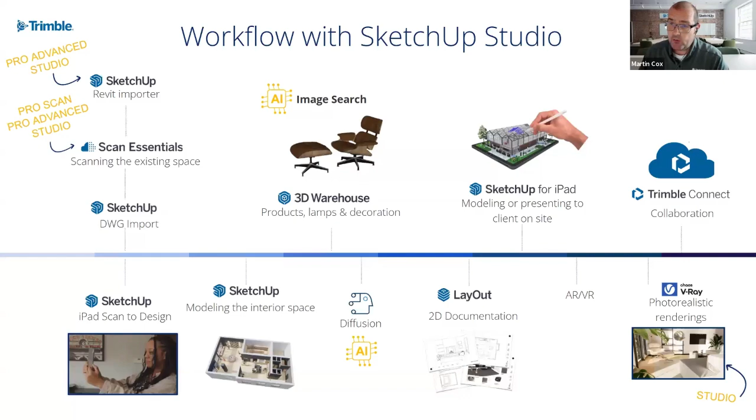Now, the first section, these are all real life examples of companies and people that have used SketchUp to develop interior spaces. Now, developing interior spaces, there are different things you need to consider. If it's for a home, there can be a lot of passion and emotions involved. Now, the great thing about using a 3D model is you can present the ideas to all members of the family, including children. So everybody can see the design concept. You're not showing 2D drawings that people don't always understand.

So you can sample your 3D materials, real life materials, include them in your model, and show exactly how things are going to look, whether it's in SketchUp or in a photorealistic render. And what this will do is it will prevent any confusion because not everybody understands 2D drawings.

A very quick example is my next door neighbor. They were getting an extension built, and they said, we don't understand the 2D drawings. I quickly modeled it for them in SketchUp. And the first thing they said is, what's that window doing there? So straight away, they were able to go back to the builder and say, no, that's not what we meant. So it immediately prompted questions to be answered.

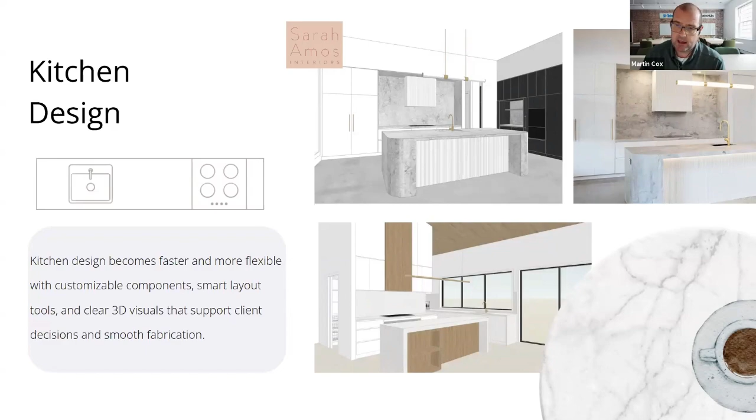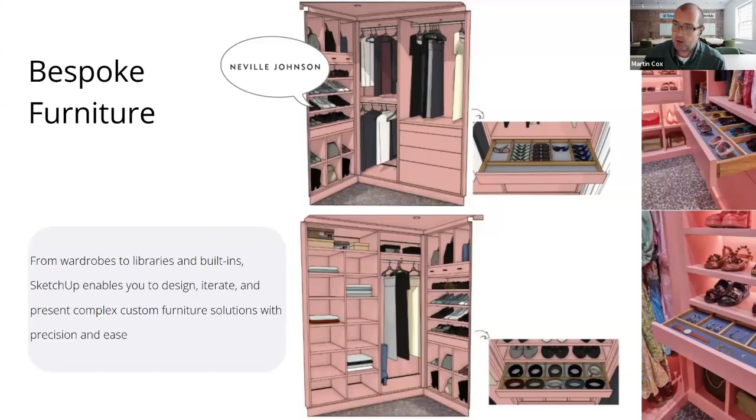It's these type of small details that can really make a difference when presenting to a potential customer. The animation we've created here really helps, sending that to a customer so they can believe in that design. So it's a small space here.

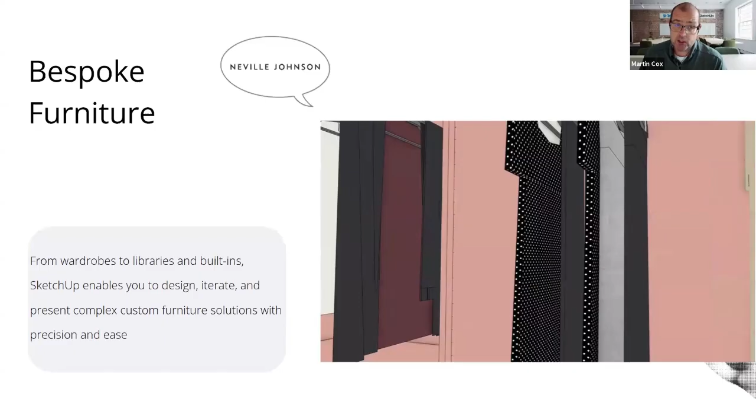I saw a question come in. I know I normally stick with questions at the end, but this is a really good time for it. The question is from Sarah: can SketchUp handle complex interior spaces, like restaurant or bar interiors?

Absolutely. This is an area where we have a lot of markets. We have restaurant design, store design, shop design, ranging from small to large, including DIY stores, so we know how large they can get. But these spaces absolutely can be worked in SketchUp as well.

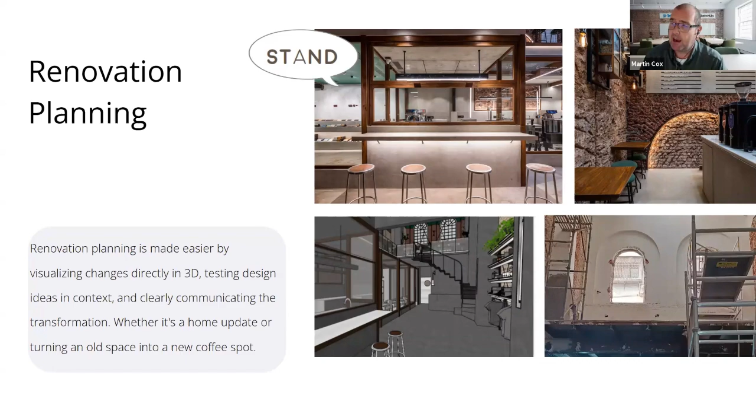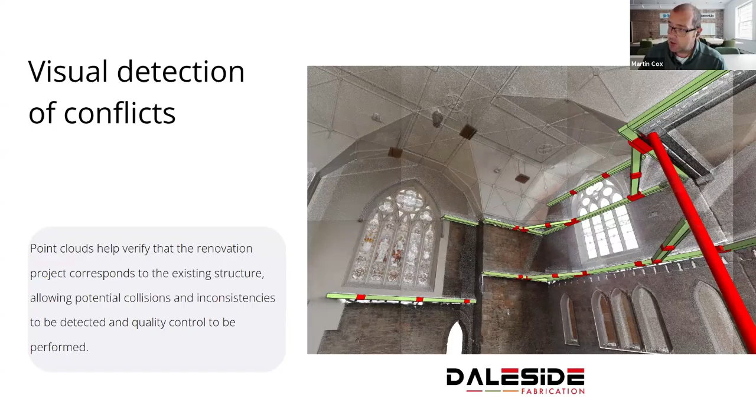Now, also working with complicated spaces, this is a conversion of a church. In this example, they had the interior of a church, and if I go to the next image, they used a point cloud scan. They're using Scan Essentials, which is in Pro Scan, SketchUp Studio, or SketchUp Pro Advanced. They scanned this very complicated interior space and were then able to fit it out, with these examples showing they wanted to put a climbing wall in this space.

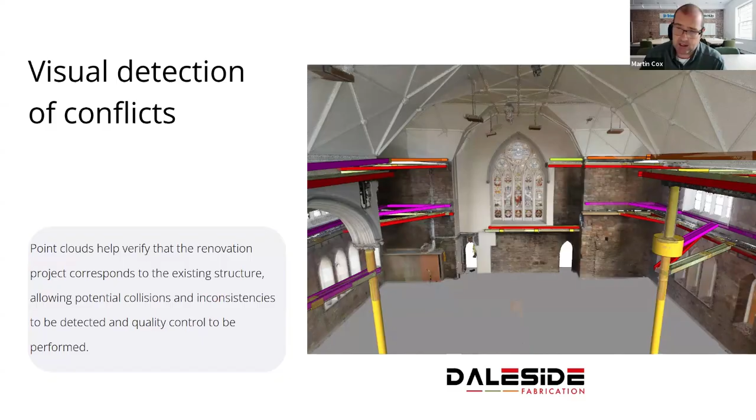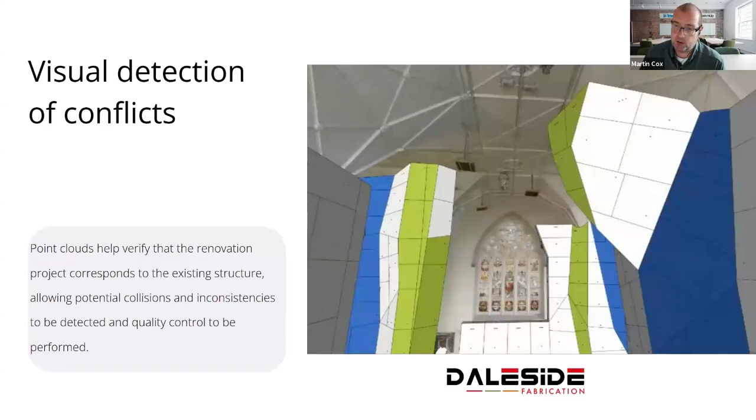Looking at the ceiling here, it's really complicated, and imagine trying to measure that. It's not impossible, but it would be very difficult. Being able to scan it using a 3D point cloud and work with that in SketchUp means you have that space correctly represented, and you can use it for detecting conflicts and information. They built this climbing wall in this particular space, but I just can't imagine having to measure that space manually. Working with a 3D point cloud in SketchUp makes it so much easier.

Again, questions come in: how does SketchUp Scan actually work? Scan Essentials, we're going to be talking about that in more detail, so we'll absolutely make sure we go through it. Understanding the process of a point cloud is a fantastic way of working with SketchUp.

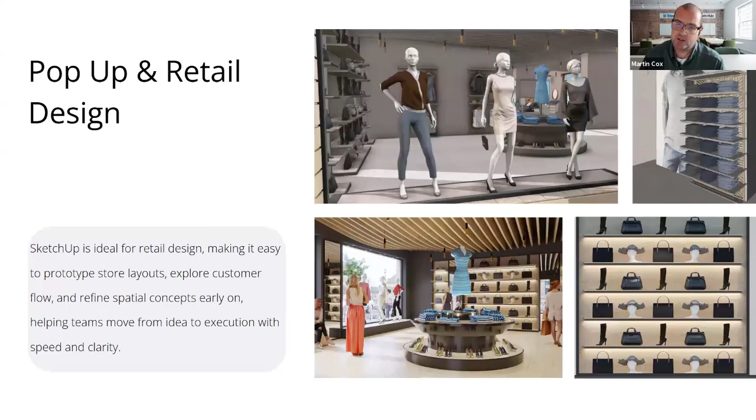So hopefully we'll go in the right direction.

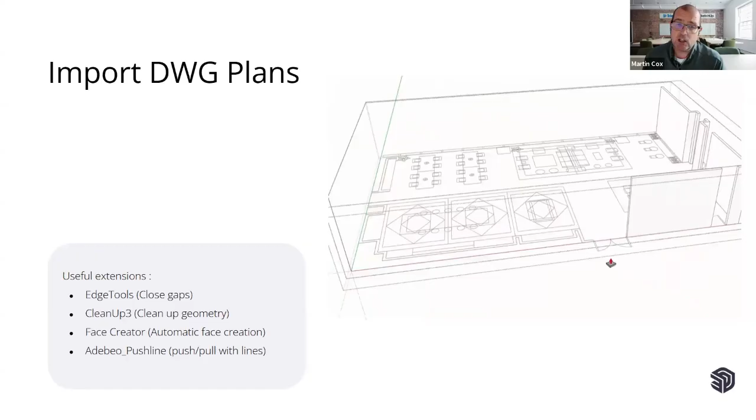So the first thing I want to talk about is you have your existing space. How do you bring that into SketchUp? There are multiple ways to do this. A popular way is creating your SketchUp model from a 2D file. A lot of people have a DWG or DXF as a plan, and you can bring that into SketchUp and, whether using an extension or just simply using the DWG file, bring that space quickly into a 3D model.

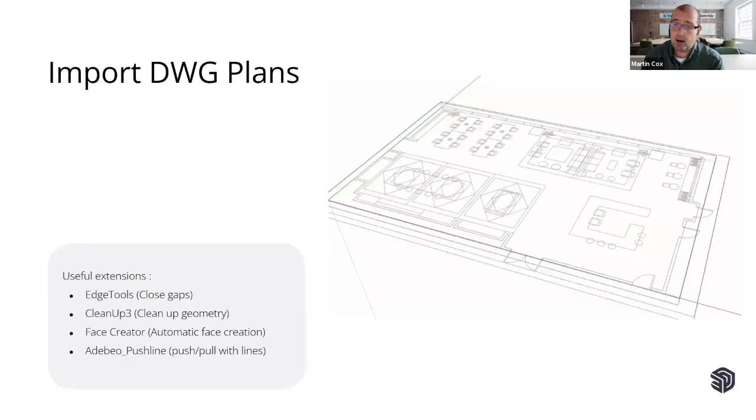Now, some of the DWGs need a little bit of cleaning up, and these are the extensions that can help with that, to help close gaps and clean up that geometry. So that's probably the most popular way of doing it, but we are moving further into more technical and easier ways of doing it.

So we've scanned the space, and we'll see how this scan actually looks. But what's quite important about this, it's one of those things we've all done: when you go to something, you measure everything, and then realize you forgot to measure something. Having a 3D point cloud means you can actually go and measure those points.

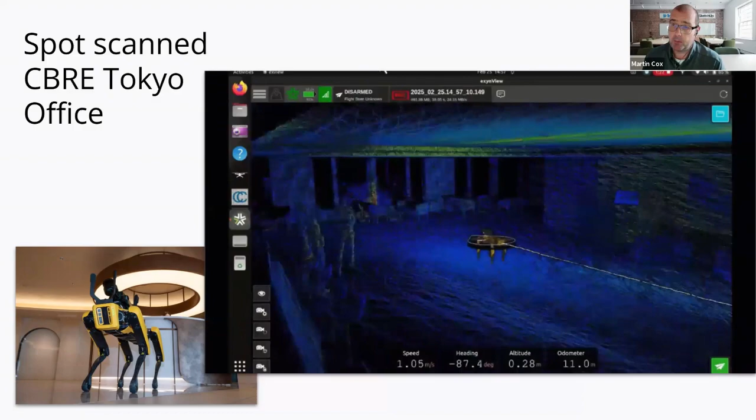And if we look at this next slide, Spot can actually walk around an entire floor and scan that entire space. This one here was for a large office refurbishment project in Tokyo, and using Spot, they were able to scan the entire office floor and use the point cloud to develop the model in SketchUp, and then the space was used to plan the new office and furniture layout.

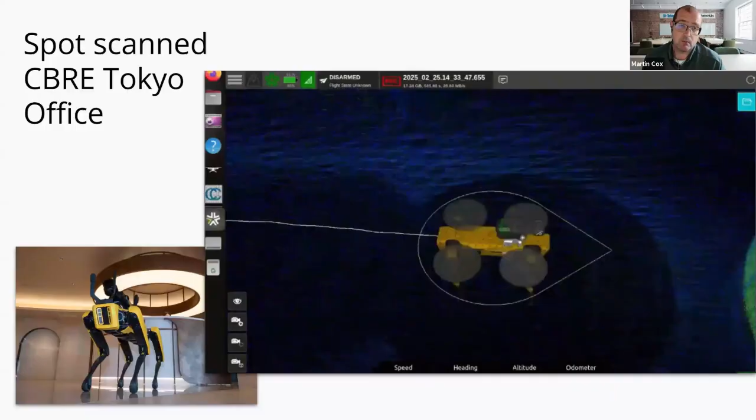So we can see in this animation here, Spot goes around and scans that entire space, and we end up with this large 3D point cloud that can be used in SketchUp. So this means, with this one, you get the raw point cloud data.

And once you've got that point cloud in here, you can use it to measure. Any point cloud format - we use the standard point cloud formats like PLY, E57, RCPs. Not going to go too technical, but then you can bring those points in and actually use those points within SketchUp.

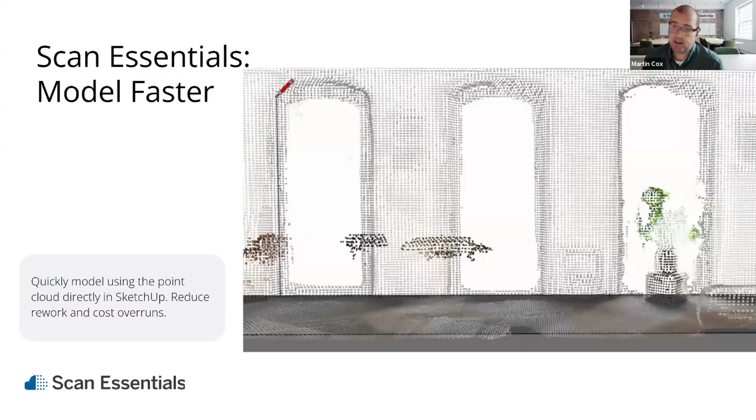There's also tools that you can use to check the accuracy of your point cloud compared to your SketchUp model. So in here, you can specify the distance that you want to see, like how it differs from the point cloud, and it will show in green or red if something does differ from there.

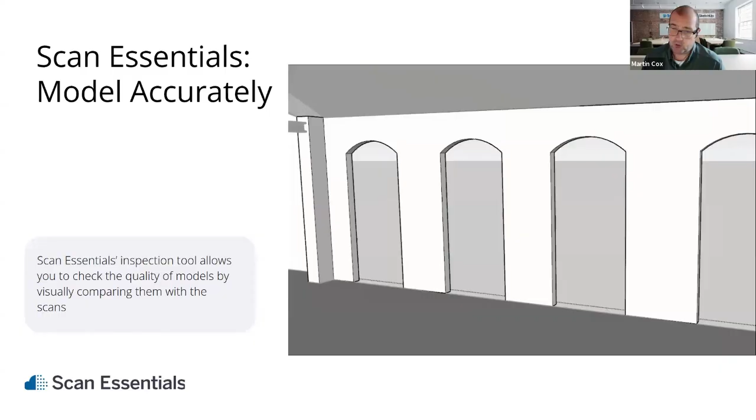So these are different ways of scanning in the room. I'm going to look at another way for the iPad later - we're going to look a little bit more focused on the iPad.

So now we have our space - our room or building, depending on what we're doing. How do we fill it using SketchUp?

It's the 3D warehouse. Now, the 3D warehouse is the world's largest repository of 3D CAD models, and these are libraries of real-world models actually created from companies. So there are companies in here that put their furniture in here, their windows in here, like Velux and people like that. And there's also user-generated models within here as well.

And it means that you can search for what you're looking for and then populate your space, so if there's options there that we want to bring in.

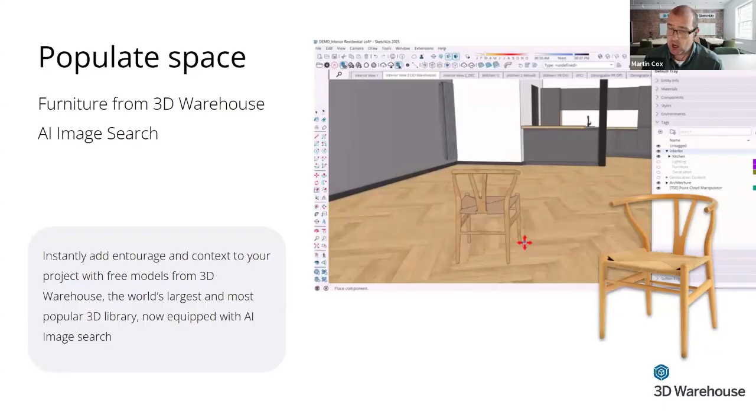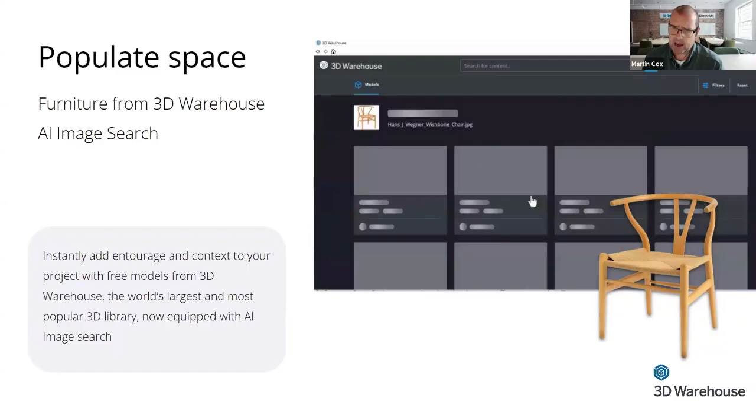Now also what we're doing, and hopefully again some people have seen this, within the search for the 3D warehouse, we have an AI search. So you can actually just drag in a photo and say, I like this chair, and it will bring up models that look like that chair that you've selected. I'll show this working a little bit later.

We're also taking this further as well. So some of the objects in the 3D warehouse are dynamic components and live components. Now these are types of components that can be configured - some of them have sets of rules. A fence is a good example - if you drag a fence to a certain size, it will say, well, you need this many posts, and it will fit in there as well.

Live components take it even further - there are actually components within the 3D warehouse that are set with colors and sizes. So there's a table on there that you can say, well, I'd like this table to have so many seats, to be this type of wood. There's a number of components in there, and there are filter options within the 3D warehouse to say show me live components, show me components of this particular size.

We're continuing to work really hard on the 3D warehouse, so you can locate furniture in augmented reality. When you find something you like within the 3D warehouse, you can choose the option to show in AR, and it produces a QR code that you can use on iOS or Android devices to place that object in a real world setting with augmented reality on your phone.

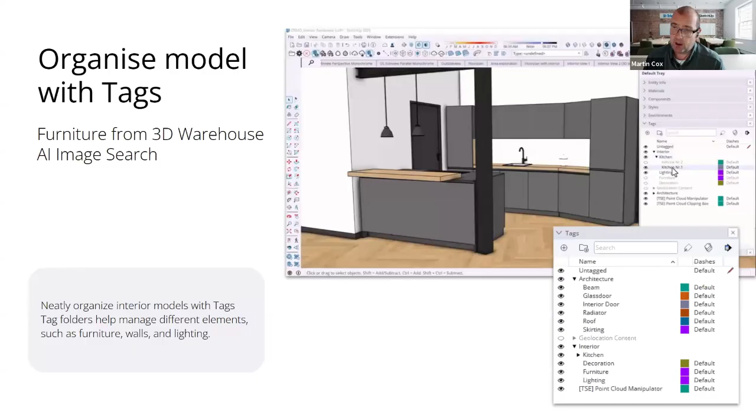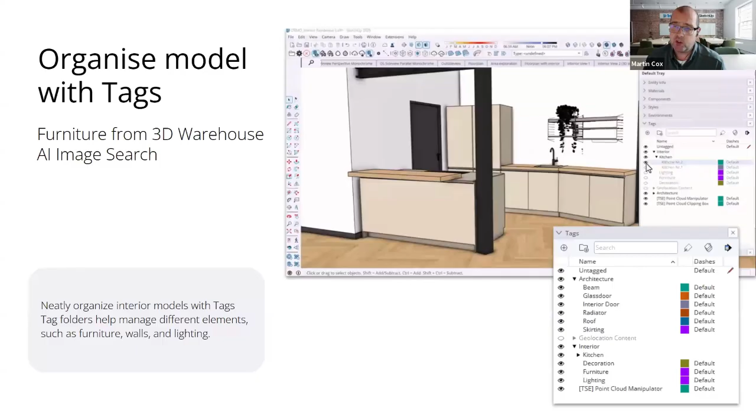When you're bringing your models in and planning your space, organizing models with tags and generally modeling efficiently in SketchUp can make life so much easier. Using groups and components is always a key part, and by grouping these you can organize them in tags and tag folders, making it simple to show alternative options.

In this animation, we're using tags and tag folders to show a couple of options for some furniture. Here's options for kitchens - do you like kitchen A, do you like kitchen B? We can actually show those alternative options to customers within our design.

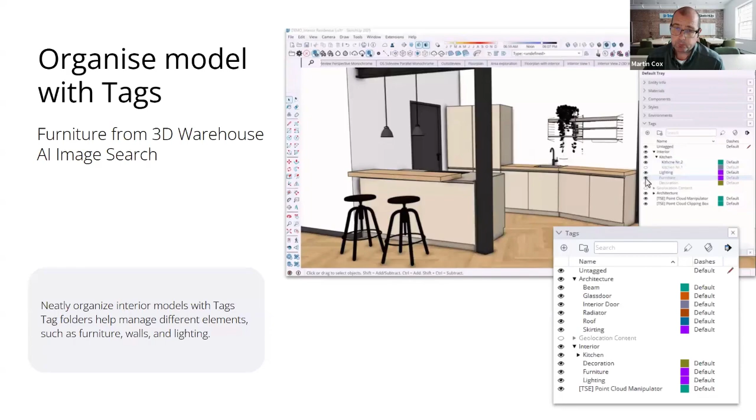So we've got all of our space planning there, and we've now filled everything in. We now have our space filled with our objects, so we want to look at some of the tools that will really help communicate and sell your design.

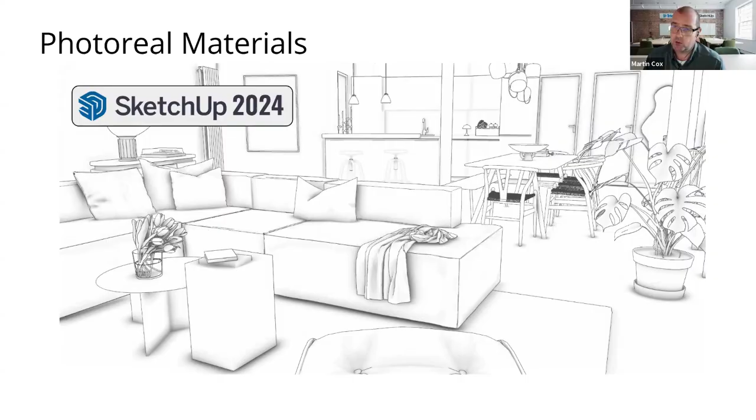Then in SketchUp 2025, we introduced PBR materials - physically based rendering materials - introduced along with image-based lighting, so environmental lighting as well. This is how something looked in SketchUp 2024, and then in SketchUp 2025, introducing those PBR materials gives that model an entirely different look. If I go back to how SketchUp 2024 used to look, look at the materials, look around the edges - you start to see a bit more light interaction and environmental reflections coming in. It takes SketchUp to that next level, able to present that.

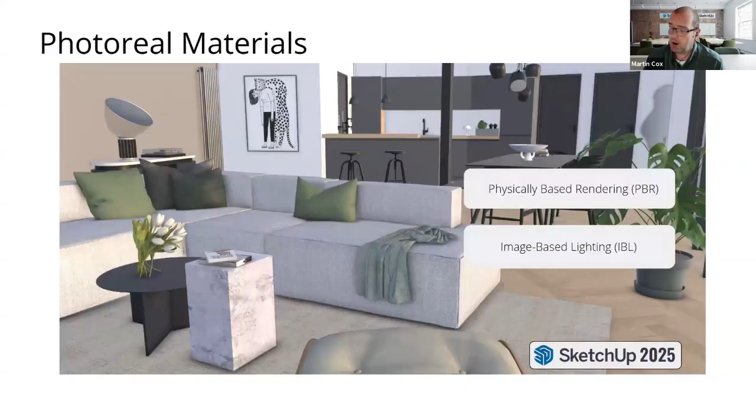These display in SketchUp and also on the iPad, so you can certainly share that with people as we go. There's an example again between those models showing the different lights.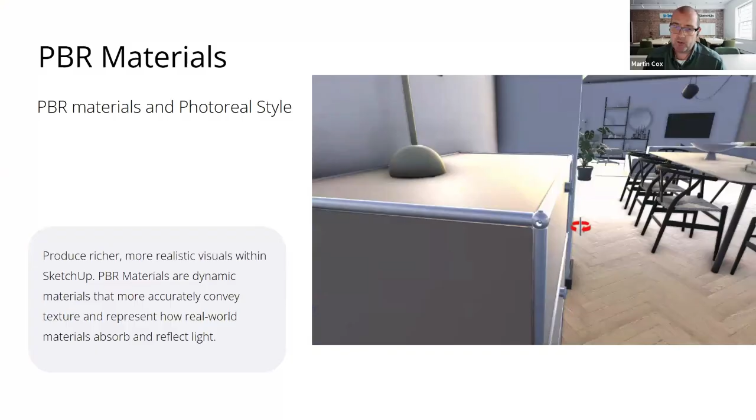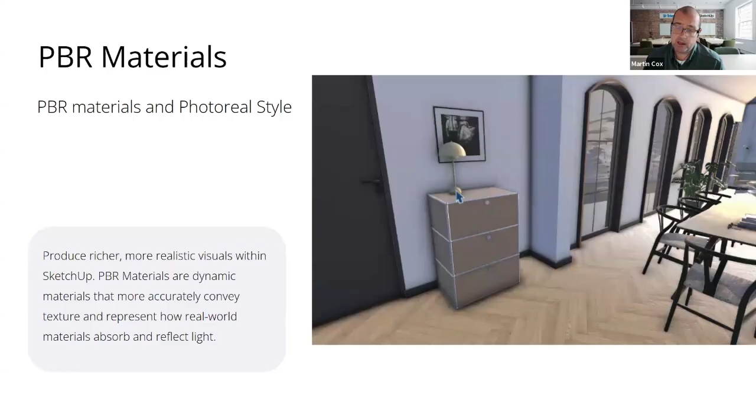And then with environments as well - alongside the image-based lighting, alongside the PBR materials, we have this image-based lighting. We have environments in SketchUp.

So you can actually give a 3D environment around your model, and this will display as we look there. This is built in with SketchUp. You'll see within the menus down the right-hand side there's an environments tab, and you can turn that on and choose if you use your environment as a background, control the light position, and that will set those reflections there.

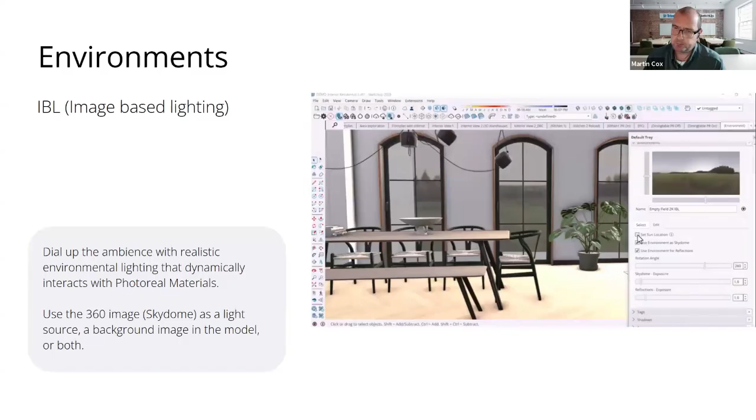And then we have SketchUp Diffusion as well. SketchUp Diffusion is an AI rendering tool. It's currently included in SketchUp, still in public beta at the moment. We're learning how people are using diffusion as we go, because diffusion is really for designers looking to generate ideas at the start of the creative process. This is not a replacement for a renderer, because what it does is it takes the SketchUp viewport and looks at it.

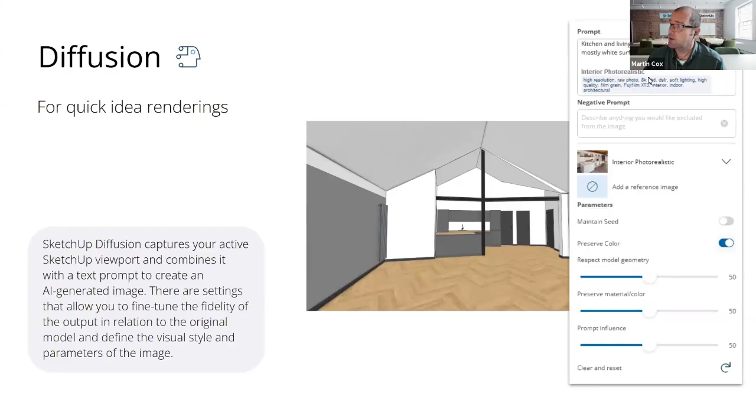You can give a description and choose how you want it to look. So in here, if we say I want an interior photorealistic, high resolution, like a photo, soft lighting, it will create this sort of AI render. And it looks very, very similar to your model, but it's not quite exact. You can also change different views there. This is generated within diffusion.

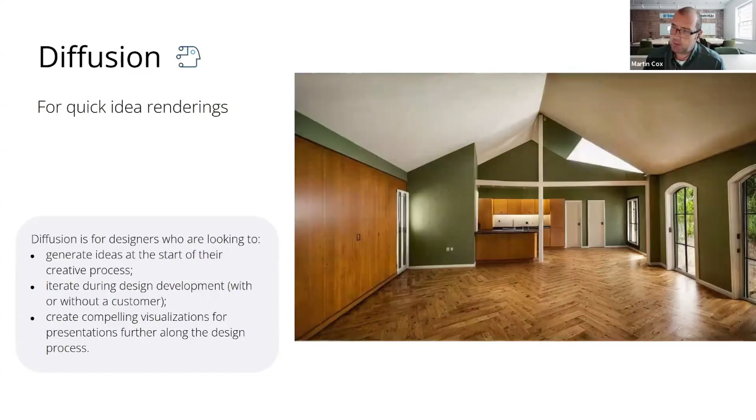So it's a great way of saying, well, is this the sort of style? Is this the sort of feeling you would like? And we can work on that. It's a very quick tool to be able to create that. But again, we're also looking at how we can take diffusion further.

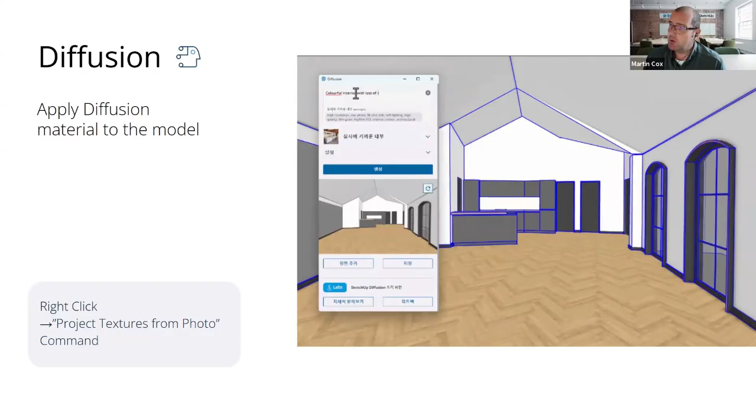So you can create a diffusion render there, and you can actually apply it as materials to your surfaces. In this instance, if we look at this animation, yes, you can zoom in, spin round, and it's kind of created it on the surfaces you can see there.

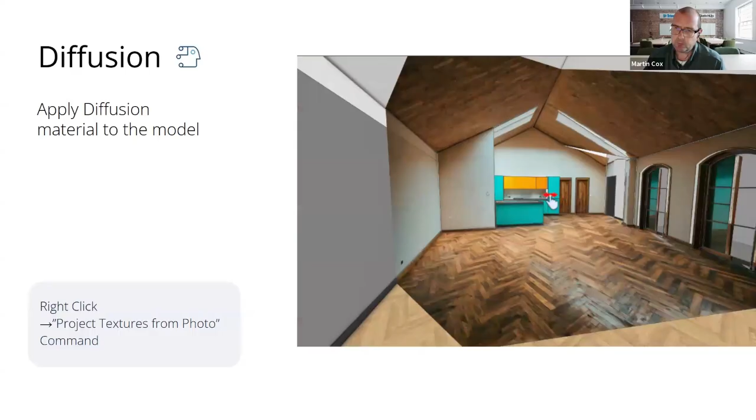Okay, so we've now created our model, populated our model, visualized our model, but what can we do even further? How can we take this even further? Now, we can generate renders. So V-Ray is included in SketchUp Studio.

And V-Ray is an exceptionally powerful render engine. V-Ray is awesome. People do get a little bit scared of it because it can appear complicated at the start, but really it's worth spending that time. Actually, when you get to understand it, it's not as complicated, and they give you a lot of tools that make it easy to work through.

I'm going to have a quick look at V-Ray as we get towards the end. But being able to create these renders, of course, it's showing people's designs photoreal, and then they get the true buy-in of saying, okay, this is amazing.

2D documentation, this is still a big thing within all our sort of lives, whether it's interior design or construction—there are still 2D drawings, and SketchUp has Layout, and we can create the layout drawings. So when it comes to things like office planning, where walls are going to be, they need the dimensions, they need those layouts.

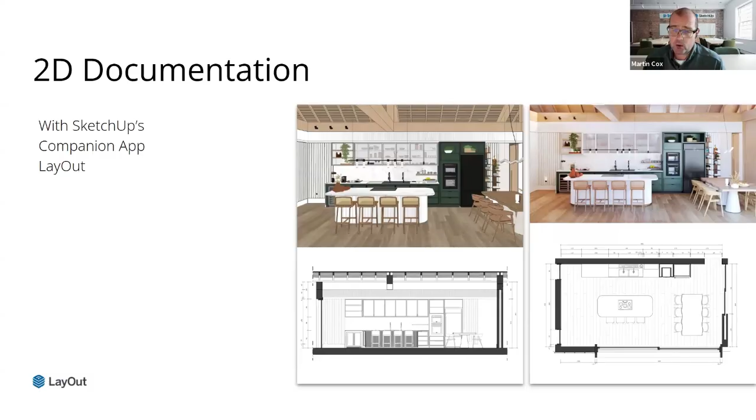But also what you can do with Layout doesn't just have to be 2D plans. Layout here has been shown to create a complete plan. So this is a design concept. In the store design that we were looking at earlier, we can show the design concept, the marketing materials, the display stands, and actually use SketchUp to create that stock capacity report.

So the reporting was done in SketchUp, using components which contain cost data fields, and then the report generator to create that as well.

So then, collaborating also within your SketchUp license, we have Trimble Connect. Trimble Connect means you can collaborate, create tasks, message team members, create to-dos. So in this one here, we can say this wasn't the door handle I required, change to a link that we give here, assign it to somebody, choose how important it is, and then you can actually send that and they will receive an email.

And you can look at to-do lists to see which ones are still outstanding. So it makes it much easier to manage these lists by collaborating in Trimble Connect. The great thing is Trimble Connect also helps you collaborate on a model, because somebody can be working on the kitchen, somebody's working on the layout, and we can choose to update the kitchen from the 3D model as well.

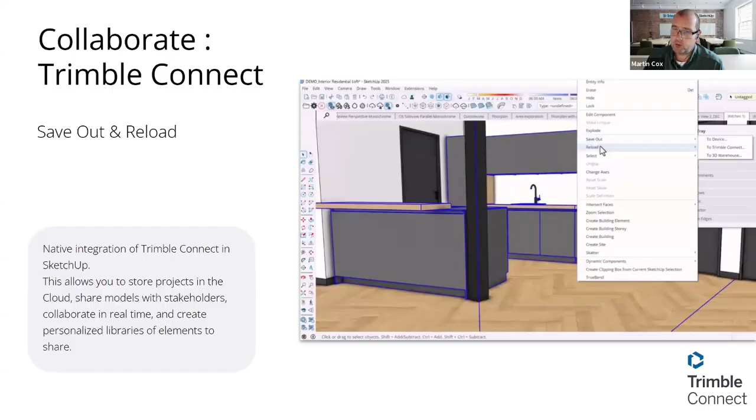Okay, so let's have a look at the iPad. Now, I know we're going through a lot of information here and it's quite quick, but the idea is I want to show you as many ideas and concepts as I can, and then you can look into it further, speak to your reseller and partners, and they can help more with this.

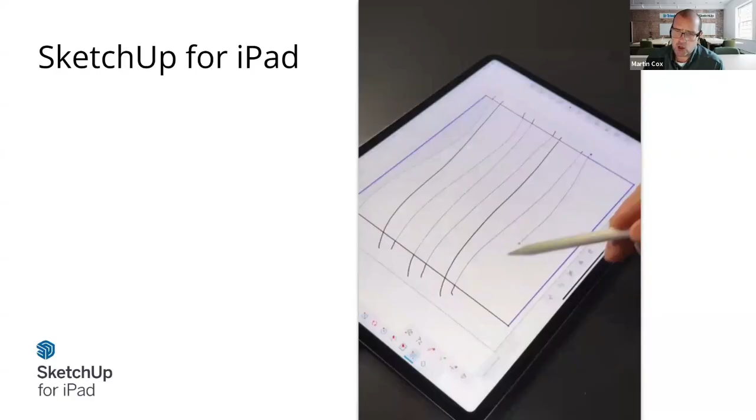Now, SketchUp for iPad is a fantastic tool, and it's opened up new ways of working in SketchUp. If you use SketchUp, you can use SketchUp for iPad because you have those familiar tools. But it takes it a bit further because using the Apple Pencil brings back the feel of sketching, but opens up other capabilities. And using the camera, you can photograph something and use this as a material, or you can scan the room using the LiDAR, as we mentioned, and create that model.

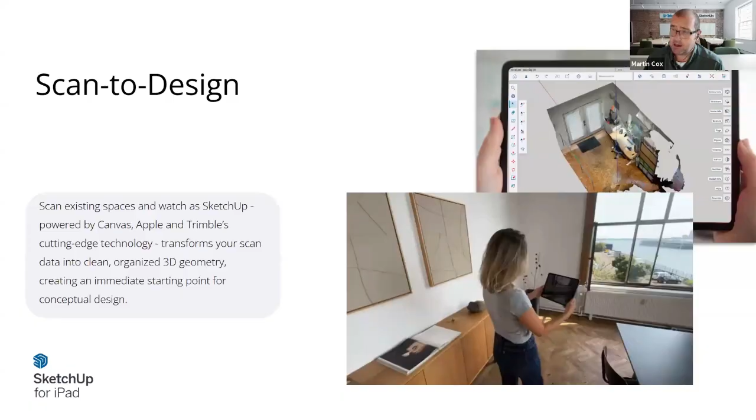So within the iPad, we have Scan to Design. Now, Scan to Design isn't the same as using the point cloud. Scan to Design will use the iPad directly to scan a space, and it will create a 3D SketchUp model of that space. I generally recommend using Scan to Design for simpler spaces, because when it comes to lots of angles and gaps and things, that's not really what Scan to Design is for. But if you have a simple space, it's a fantastic way of creating an immediate starting point, and you can then take that further. This animation shows the sort of input you get from that.

And Scan to Design is included in SketchUp for iPad. This isn't an extension or anything, it's actually included in SketchUp for iPad, which is included in your SketchUp license. It does require an iPad Pro. The reason for this is because the iPad Pro has that fixed technology. We always get asked, oh, does it work on other types of tablets? There's hundreds of other models of tablets, and we can't make it work on all of them, so we only have SketchUp for iPad on the iPad Pro.

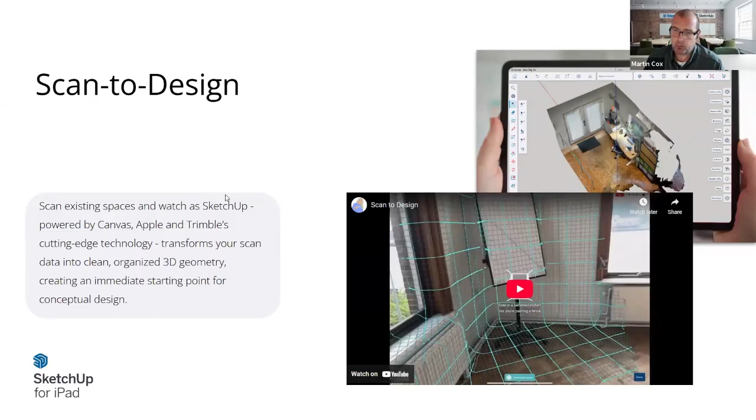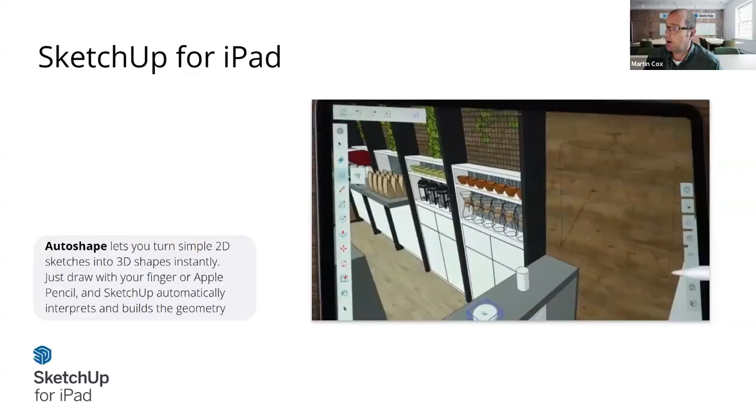Also in SketchUp for iPad, we have Auto Shape. Auto Shape means you can create a sketch there, and it uses particular shapes and keys, and then knows to turn it into a 3D model. These can be windows, these can be simple shapes. So in this example here, it places that window and actually builds that geometry for you within Auto Shape. It's an amazing tool.

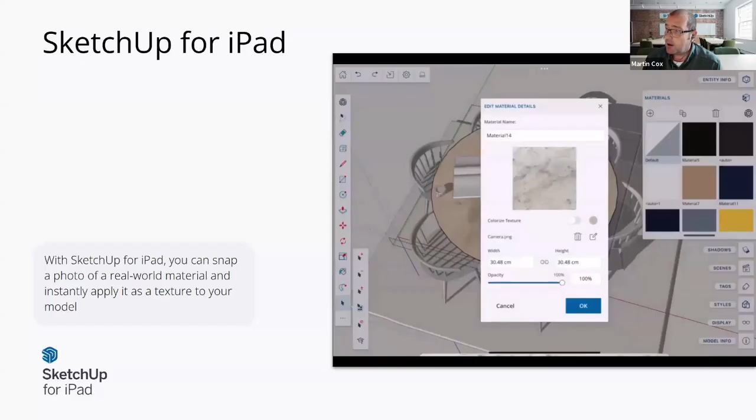Also, materials I mentioned about - you can take a photo of a material within the iPad using the camera straight away and actually use this straight away in your model. So in this instance, taking a photo of this marble, you click on plus, add material, use the camera, and now we have a marble material that you can paint with. These are just a few of the things that SketchUp users get with the benefit of the iPad.

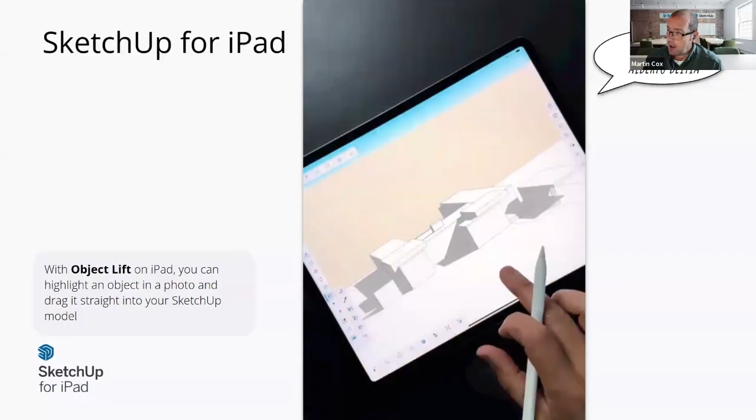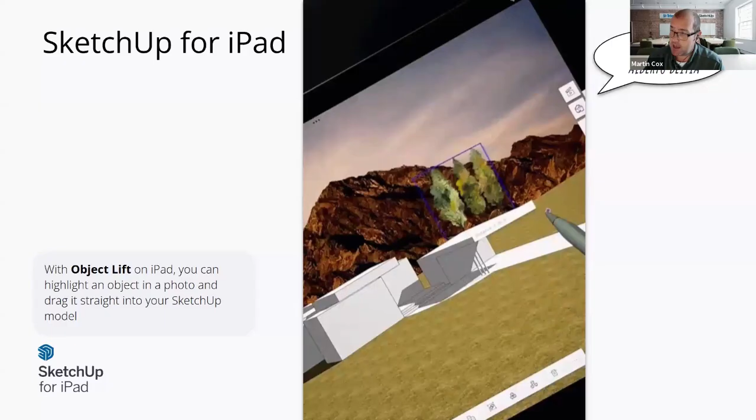And also Object Lift. So if people are within iPads, you've got Object Lift within your images there, and you can actually use these in SketchUp as well. So open up your gallery alongside SketchUp, and you can use Object Lift and bring those in as 2D images.

Augmented reality - so also within the iPad, you can actually walk around your model. So this is a pop-up coffee shop example here, and you can walk around your model using the iPad. Now, this always blows people's minds - you can walk inside of your coffee shop, you can walk behind the counter. So it really gives people, imagine giving that to somebody in interior design and walking around their interior and showing them how it's going to look, how the models are going to look in their existing space. So yeah, it's a fantastic addition there.

I saw the question come in around the versions of iPad Pro. It's the one with the M processors, so from the M1 processors, which is about 2 to 3 years now. I don't know exactly, but yeah, it's with the M processors.

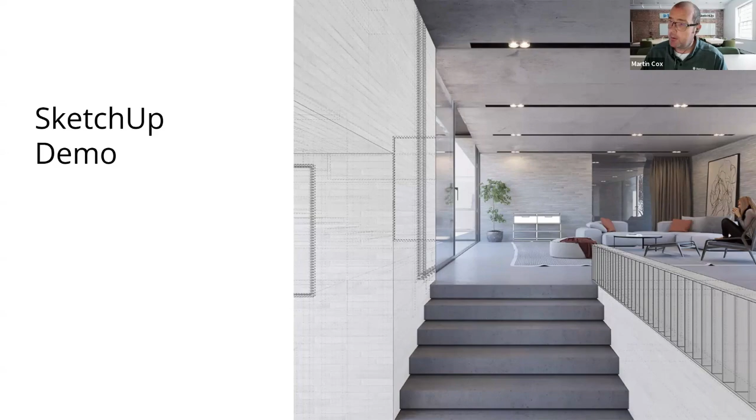I went through a lot in slides there. I want to get into SketchUp because I want to show some of those things and some of the questions that came up, as quickly as I can. So the first thing I want to do is have a look at our 3D point cloud.

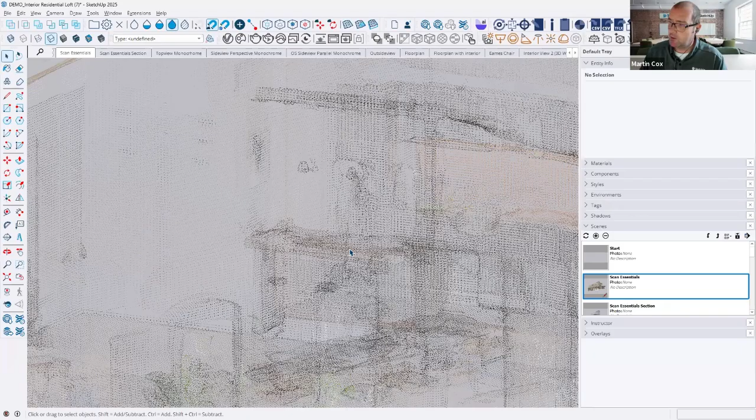This is how a 3D point cloud comes into SketchUp. We can see that full 3D space, and how the points look. In this instance, we've got it fairly semi-transparent, bringing the points across. I'm going to use scenes, and you can have scene controls as well within SketchUp here. We can see that point cloud as it comes in, cutting through there, so we have our model as we go through.

Now these points, the toolbar here is for Scan Essentials. You can control the visibility of it, and if you select those points, control how you measure them, create surfaces like floor surfaces from points. There's a number of tools, and we're not going into that in detail.

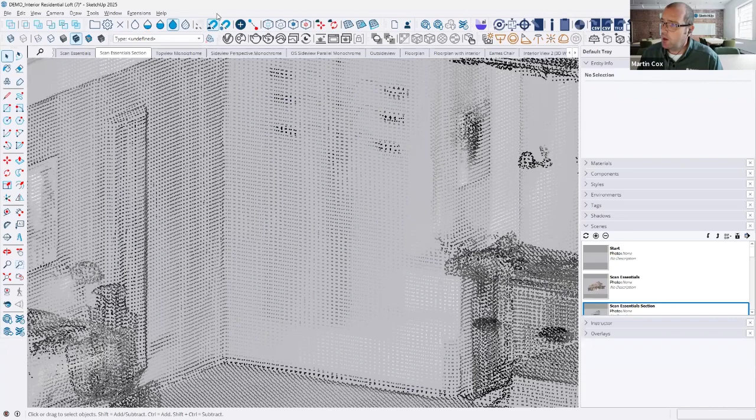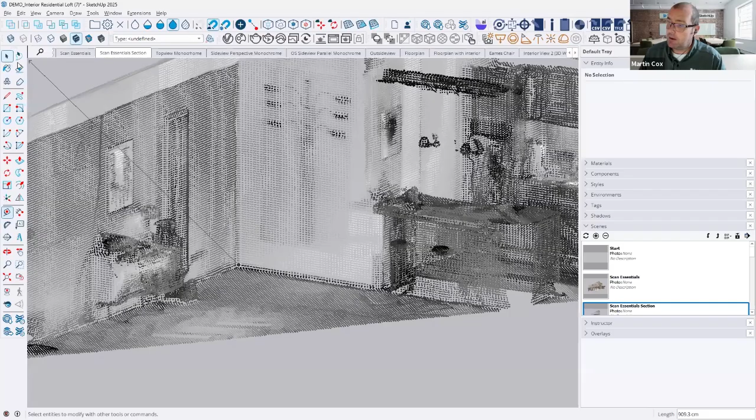At the moment I've got it set so I can select points here, so I can pick a point cloud point. With our measuring tool, I can pick up those points and measure our wall there, and really see how things look. Within that point cloud, it's such an easy way of grabbing that 3D space and being able to measure there as well.

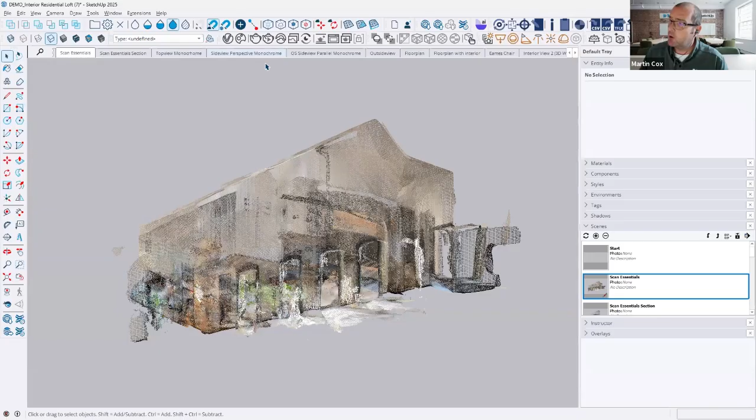Going through, I've got our whole model here. So it's not just from Scan Essentials—we've used Scan Essentials to then model our space as well. If we have a look at our floor plan, with our interior models as we go through, we've fitted out our space and put in some of the models from the 3D Warehouse that we can look at as well.

This is using those new PBR materials, so we can actually see that this is not a render—this is actually looking at it live as we go through. We can really set those up.

Now let's have a look at the kitchens here as well. I mentioned about using our tags, and in our interior we have a couple of different kitchens, and we can have a look—do we want to see kitchen 1 or kitchen 2? You can show very quickly which option you prefer for your kitchen, our minimalist shelving or a little bit more storage space. This is what we were talking about earlier.

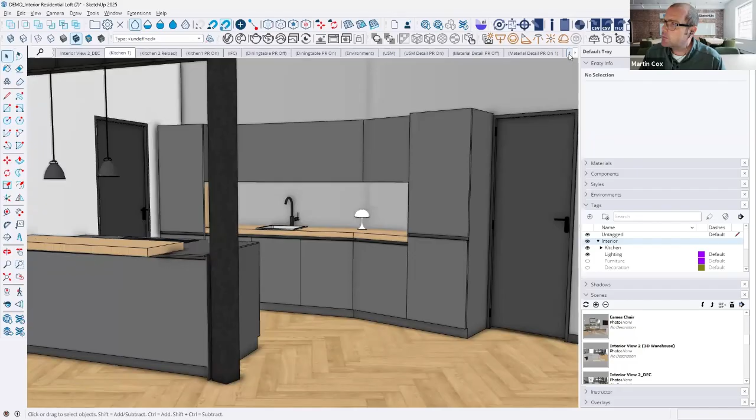Okay, now what we can also look at—I'm just trying to think, looking at time, making sure we have time to go through as much as we can—within our space as well. Which space do I want? I want the... there we go.

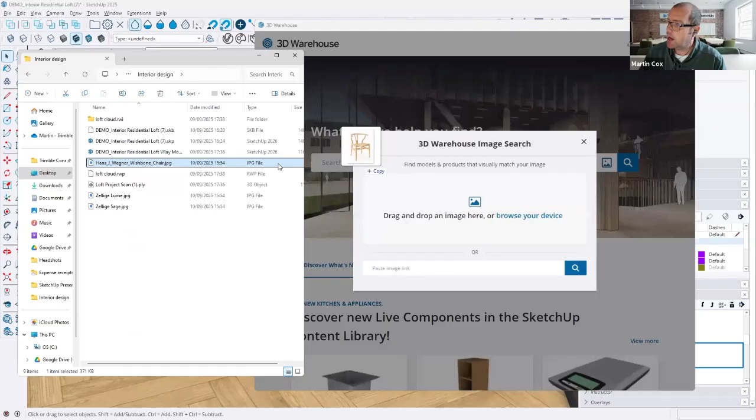I want to show what I mentioned about the 3D Warehouse. So loading up our 3D Warehouse here, I'm going to show that AI functionality we looked at. I've got an image here of a particular chair—a quite famous interior design, the Wishbone chair. I can drop the photo in, and now it's looking through the 3D Warehouse to show me images that look like that chair.

I did see a comment come in regarding some of the models being quite heavy sometimes. You can bring in filters, so you can say you want to show a particular poly count or file size—only show file sizes at a set limit, or scroll down and choose that. This one's not too bad, it's an 8 megabyte model, but it's quite detailed.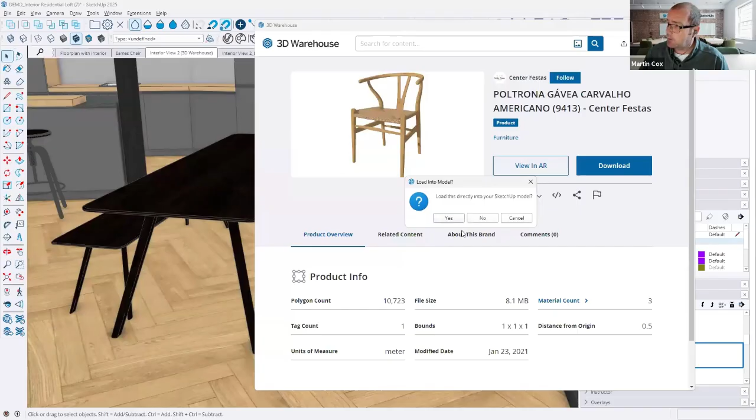There's that view in AR button I mentioned earlier, so if we wanted to look at it using our phone or tablet we could, but I'm going to download it and put it straight into my model here. And there we go—we can put that on the end of our table, so we have that from the 3D model there as well.

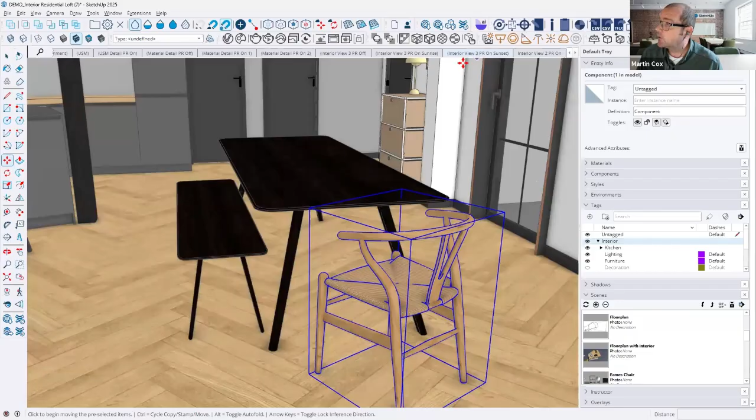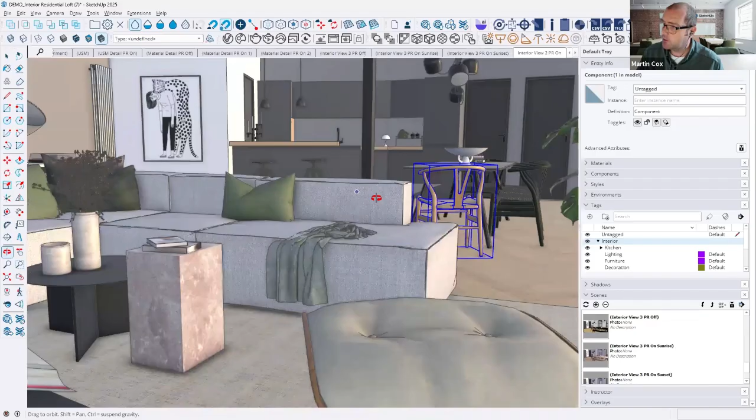So that's going through a lot of information there. And we also have within this particular model, if I have a look, we can really set it up. So now we've got that PBR and environment on as well. So we can choose those different sunset lighting positions and start to see how that really affects our look with that PBR material. And as we look around there, it's giving that much more realistic feel to our model.

Okay. I'm going to flick over to another model very quickly. Now, this is a slightly different looking model. This one's been set up using V-Ray. And one of the reasons it looks a little different is that we have a number of these white objects. These are called proxy objects. Within V-Ray you can create proxy objects, and you can load these in from the V-Ray toolbars. These proxy objects are simple in SketchUp, but when you render them in V-Ray, they look a lot more detailed. So I'm going to start my V-Ray interactive renderer here.

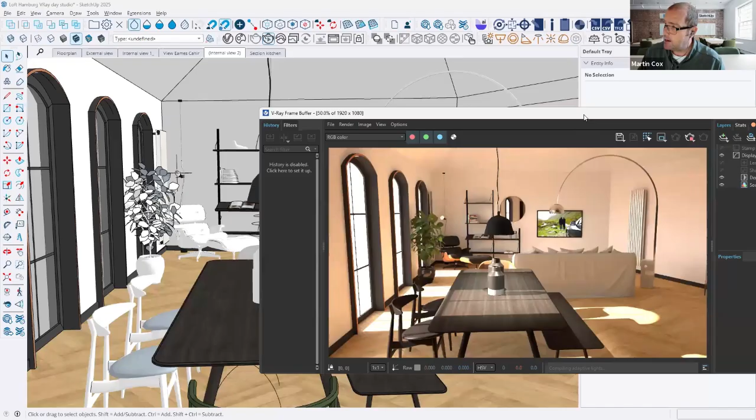Now this is much easier to work with if you have two screens, but I'm only showing one screen here. And I can see how this room is set up to render within V-Ray. So it's just doing some processing and now we have the render of the room. And just to point out a couple of things, like that very simple looking tree there, that's now a much more detailed tree within V-Ray. And also the vases on the table and our lighting and rendering there.

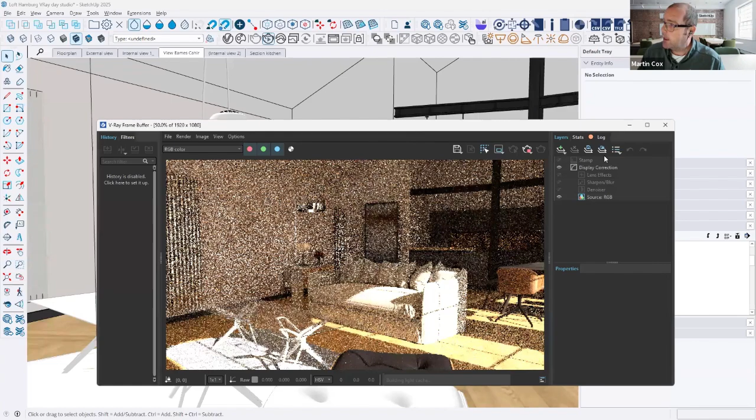And with the interactive renderer, say I want the view from my Eames chair in the corner there, let's see how this room looks. So it will process the different view as we go. And if I change materials, so if I select my wall here, which is a slightly magnolia color, we can make it a little bit more exciting. I've selected my material there. If I just move that down so we can see the color wheel, if I just change that material, straight away that updates in the renderer.

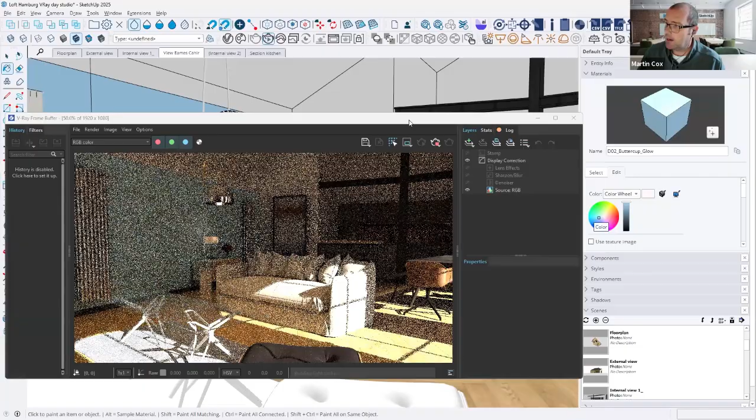And we can then get a different feel for the room completely. So do we want the warm color there, or actually let's go for a light blue, so make it a bit of a cooler feeling feature wall. And we can really get that information there.

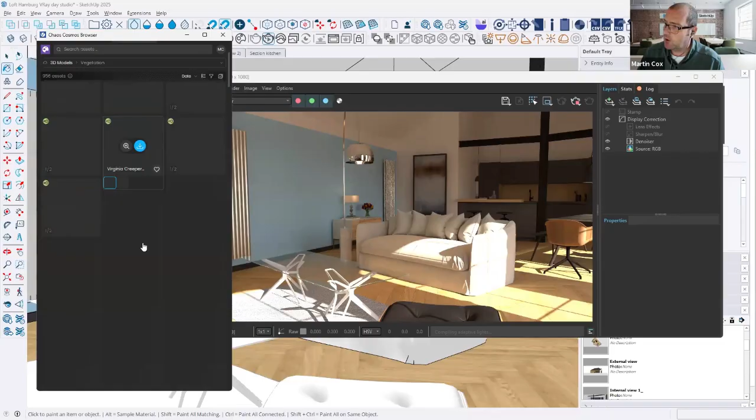Okay, the last thing I'm going to show, because I want to make sure we've got a few minutes of questions here. If we have a look at some of the tools within V-Ray. So I'm opening up here the Chaos Cosmos browser, so we can actually look at different 3D models. These are already preset models here. So we can look at furniture and some of those options that we have in there. If I look at my vegetation section, I can bring in different plants or creepers here. Or if I say potted plants, we can bring these into the room.

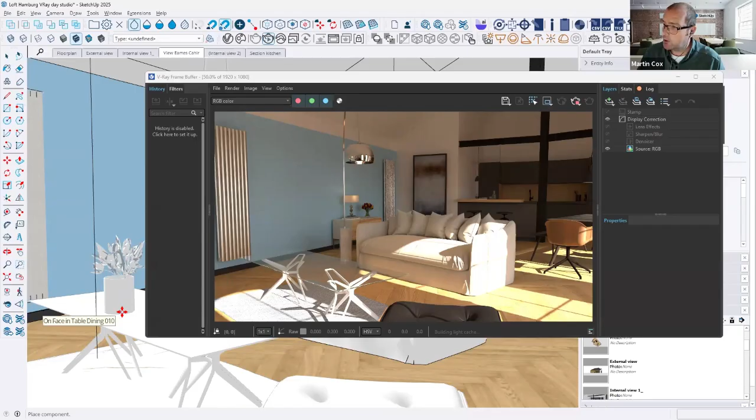So I'm going to choose this particular rose vase here, and I'm going to bring that into my model. We can see in SketchUp, it's quite a simple looking white model, but what we'll see in V-Ray when that comes in is my detailed rose vase there as well. So I can close that down and just zoom into that.

And we will finish on that one there. Okay, so quite a simple render, but hopefully showing that there's a lot we can do in interior design. And I've been through an awful lot.

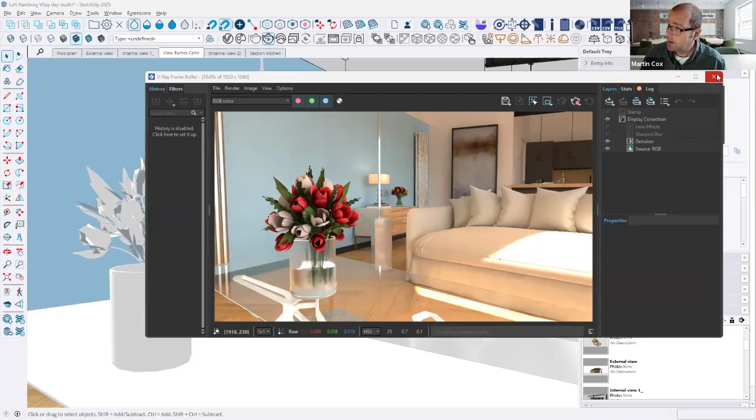So let's look at some of the questions, and please keep the questions coming in. How do you get a Revit model into SketchUp? If you have the correct version, SketchUp Advanced Pro or Studio has a Revit importer. You can choose import, and one of the options is to import a Revit file. It imports the Revit file and creates all the Revit layers as tags in SketchUp, so the Revit importer is really fantastic.

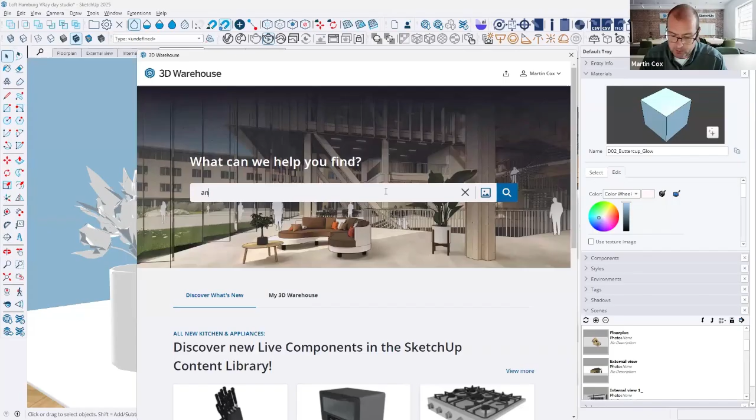Within the 3D Warehouse, are there options for antiques? There are millions of models in the 3D Warehouse, and the more specific you search, the more options will be displayed. If I search for antique, I get 6,000 models - antique furniture, antique houses, phones. So yes, there are many models in there.

Can we import OBJ files? Yes, OBJ files are absolutely fine. Within SketchUp, we want to make sure we're as compatible with other software as possible, so there's a huge number of different file types we can bring in.

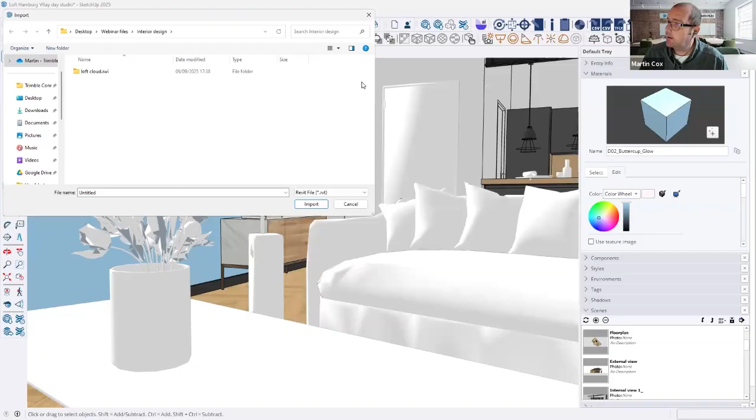So a question regarding upgrading. If you have SketchUp Pro and would like some of the features I've shown, like Scan Essentials or V-Ray, talk to your reseller and they'll walk you through the upgrade options. The great thing is that if you're six months through your 12-month subscription, you can just upgrade for the remaining six months and only pay the additional charge for that option - you don't have to buy SketchUp Studio for the whole 12 months. It will just upgrade for the remainder of your subscription, but the best thing is to talk to your partners on that.

Can you do exactly the same things with SketchUp for iPad as with classic SketchUp? Yes. Like I said, when you initially go into the iPad it's a little different working, but you can do everything in SketchUp for iPad, and more, with some of those tools as well.